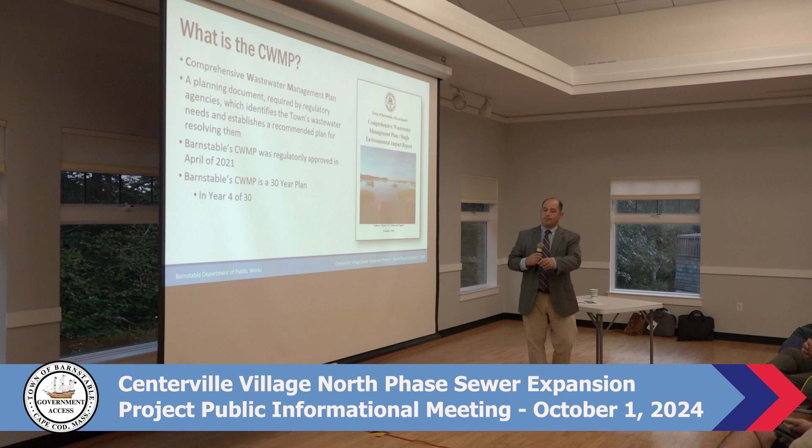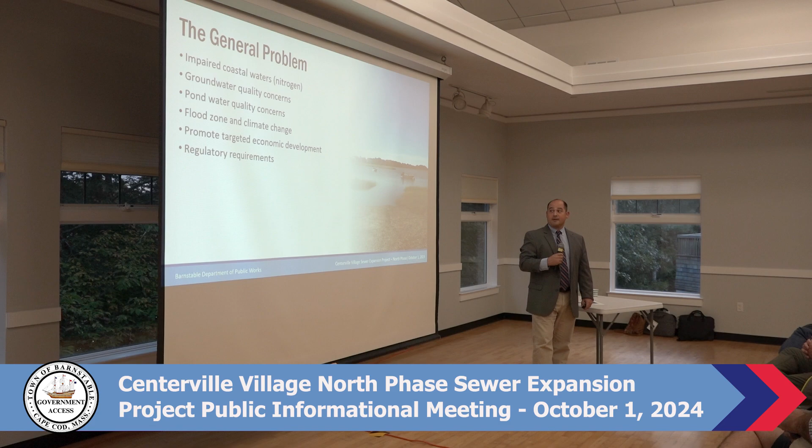Thank you. And the general problems we're looking to address with the plan, the biggest one is nitrogen and impaired coastal waters, but there are others, right? There are groundwater quality concerns, pond water quality concerns, which is one that we're addressing with this project actually. Flood zone and climate change, promoting targeted economic development, as well as achieving regulatory requirements.

That actually worked, Ainsley.

Oh. So just going back through the nitrogen pollution issue in the town of Barnstable, nitrogen pollution has been documented really in all of southeastern Massachusetts as a problem by the Massachusetts Estuary Project. Barnstable's coastal waters are impaired due to nitrogen, particularly the southern facing embayments. The town must meet the total maximum daily loads, which is basically the nitrogen budget of these coastal embayments.

78% of the controllable nitrogen, so the nitrogen that humans can control, comes from septic systems, as you can see in this pie chart here, which comes from the Cape Cod Commission's 208 plan. So Title V systems are not designed to deal with nitrogen, at least not as currently designed.

And currently approved innovative alternative septic systems don't remove enough nitrogen to achieve the total maximum daily loads in Barnstable. Thus, sewers are necessary to achieve the total maximum daily loads, and that is kind of the basis of the town's comprehensive wastewater management plan.

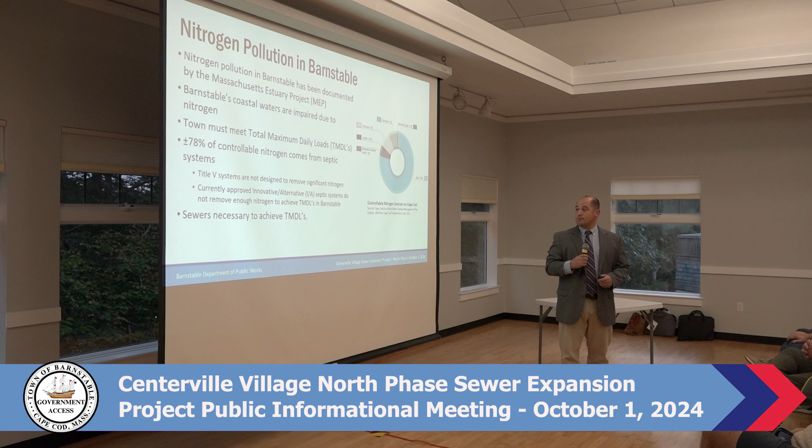What's the cost of inaction? What if we just don't do anything, right? Well, the Federal Clean Water Act compels the community to meet the TMDL. If we do not, there would be further degradation to our water quality, which is obviously bad. Negative impacts to the local economy and property values. The town also risks a court order, lawsuits or other regulatory enforcement, which would put the town in a bad position.

There are newly proposed Title V regulations that also come into play here. The town must implement watershed management plans, which effectively is our CWMP, or the new regulations may actually require every property in town to install a new innovative alternative septic system if we do not complete our plan. So it's another reason why proceeding with our plan as designed makes sense.

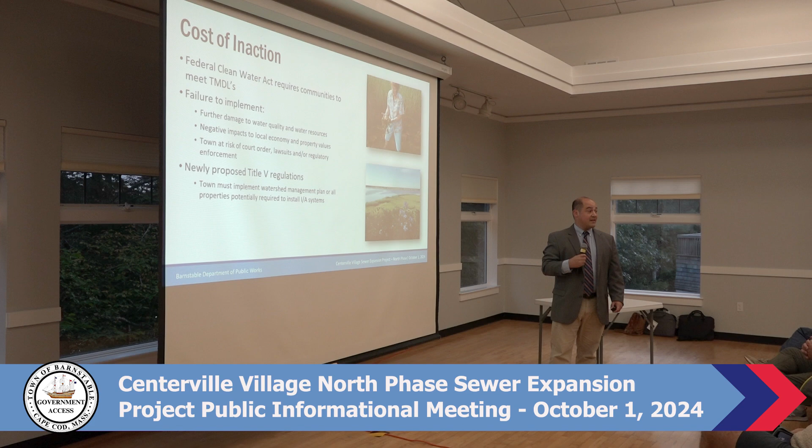So what is Barnstable's plan? It's three 10-year phases of sewer expansion. Again, we're in year 4 of the first phase. It includes about 190 miles of new sewers in the town. Just under 12,000 properties have been identified to be connected to the sewer.

Each phase is not one big project. Each phase will actually have smaller projects within them. The phases are really review periods, effectively to look back and make sure that we're making progress and reviewing if we need to adapt the plan during those intervals.

And this project that we're discussing tonight, the Centerville Village Sewer Expansion Project, particularly the north phase, is the 3rd major sewer expansion project in this program. We have completed 2 major sewer expansion projects to date, one being the Strawberry Hill Road Sewer Expansion Project, and the other being the Route 28 East Sewer Expansion Project.

The plan leverages existing infrastructure to the maximum extent possible. We have the benefit of having a treatment plant. We do need to upgrade the treatment plant, but we have that infrastructure in place as a good solid foundation for the system. We do have existing sewers, mostly focused in Hyannis area, but expanding out now into Centerville, Marston's Mills, Cotuit, etc. And portions of Barnstable Village are also sewered. So we're looking to leverage the existing system to the maximum extent possible.

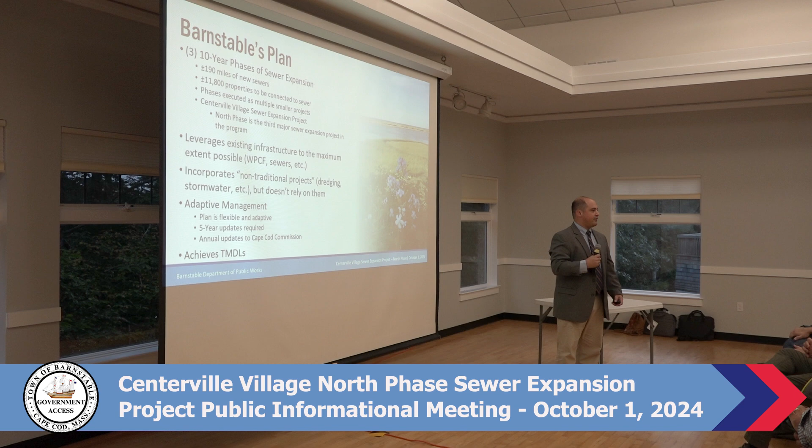And the plan will achieve the total maximum daily loads, which again are the water quality budgets for our embayments, which means we are predicted to achieve healthy environments upon completion of the program.

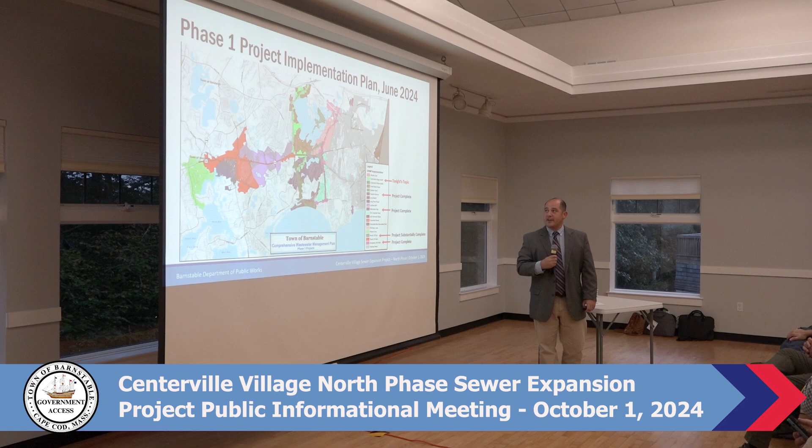And as I alluded to earlier, each phase is broken down into smaller projects. This is what we call our phase 1 implementation map. This shows all the various projects that we will be executing in order to complete phase 1. On the bottom right is kind of a legend which goes over the projects that have been completed or are in process. So in this location here, the pink, that is our Strawberry Hill Road sewer expansion project. That project has been completed.

In green is our Route 28 East sewer expansion project. That project has been completed as well. In this light green is the project that we're talking about this evening, which is the Centerville Village sewer expansion north phase. In the dark green is the southern phase of that project, which is not what we're discussing this evening, as it will be executed at a later date. We'll talk about that in a minute.

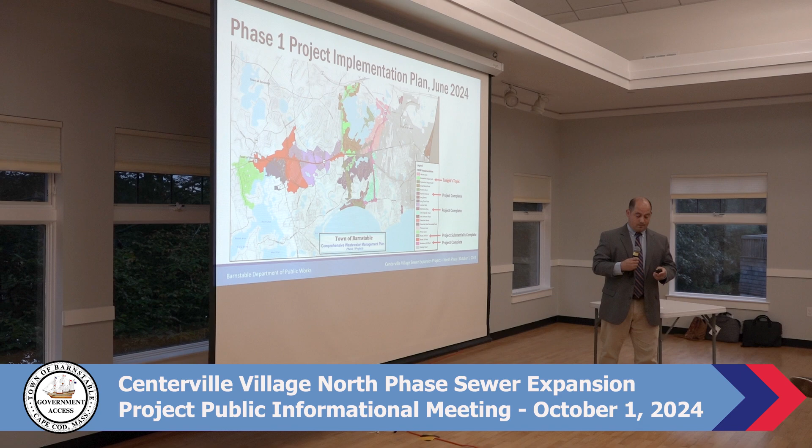So how did the project develop? A little history. So the project ultimately came to be as a reaction to the proposed offshore wind project. So the route initially was identified to sewer the roads that were going to receive duct banks as part of the proposed offshore wind project. It was identified early on that if these projects were to occur, we will need to install the sewers in those roadways,

really to deal with technical issues and construction coordination issues that abound by two large infrastructure projects needing to be constructed in the same corridor, but also to get the benefit out of the paving at the end and not have to rip up a road twice and repave a road twice. So ultimately that's where this project started.

Route 28 from Finney's Lane to Old Stage is in the north phase, and the section of Main Street and Finney's Lane in the Mothers Park area is in the north phase, even though it's south of 28. So the north phase, we're anticipating construction to commence this fall, probably later this fall, but we're in the contracting phase right now. And the south phase is still in development, and we're anticipating construction to commence next fall.

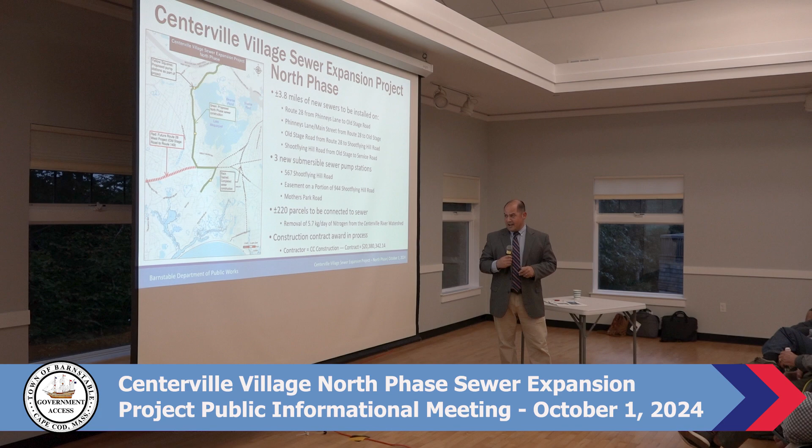There are about 220 parcels that are anticipated to be connected to sewer at the completion of this project, which will remove about 5.7 kilograms per day of nitrogen from the Centerville River watershed. For perspective, that's about 15% of the nitrogen we need to remove from the Centerville River watershed in order to achieve the TMDL.

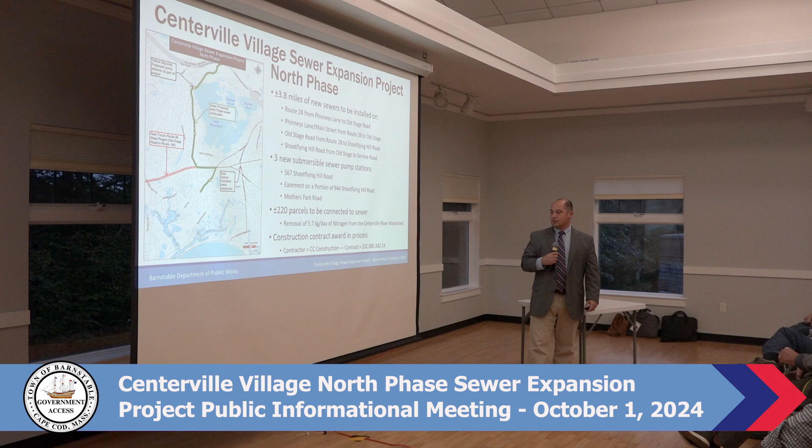And the construction contract award is in process. The contractor has been selected. The low bidder was CC Construction, who actually did the construction of the Strawberry Hill Road sewer expansion project as well. The contract is scheduled to be $20.38 million.

So I wanted to provide some conditions just to kind of let you know what to expect with the work. These are conditions that are in the contract that the contractor will have to comply with. The contractor has 870 days, which is roughly 29 months, to complete the construction. Now that doesn't mean construction will be occurring for 29 months in any particular location, but that's for the whole 3.8 miles of the project.

We anticipate construction starting sometime before the end of the year and completing sometime in the spring of 2027. Our normal working hours will be Monday through Friday from 7 a.m. to 3:30 p.m. All the work on Route 28 will be night work and will occur Monday through Friday from 9 p.m.

...to 5 a.m. Work hours may be modified and extended upon the approval of the DPW director if it's deemed to be necessary. As far as restrictions, we won't be working on town observed holidays, no work from Memorial Day to Labor Day. That said, these restrictions may be modified and waived by the DPW director if it's deemed to be appropriate in order to achieve the goals of the project.

And the contractor's traffic management plans must be reviewed and approved by DPW and emergency services such as police and fire, etc. We also coordinate with school buses. We also coordinate with the postal services just to ensure all these services know where construction is occurring, and we can make arrangements to make sure that these services are still available and that work is being done in a safe manner for everybody.

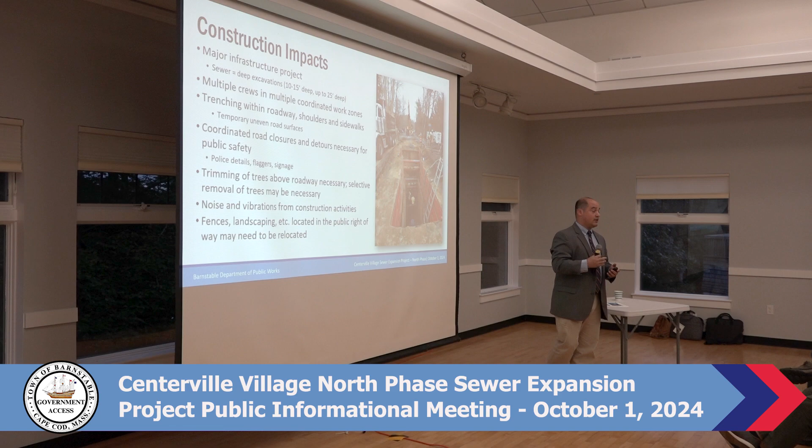There will be noise and vibration from the construction activities, and fences and landscaping and stuff that's located within the public right-of-way may need to be relocated. So what does this look like, right? So there's just some quick pictures. We've all seen this, but we'll come in, we'll do some tree trimming in the areas that we've identified that need to be dealt with.

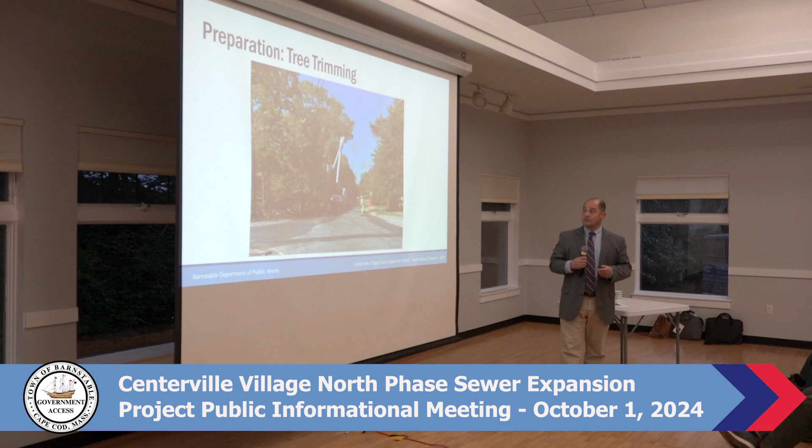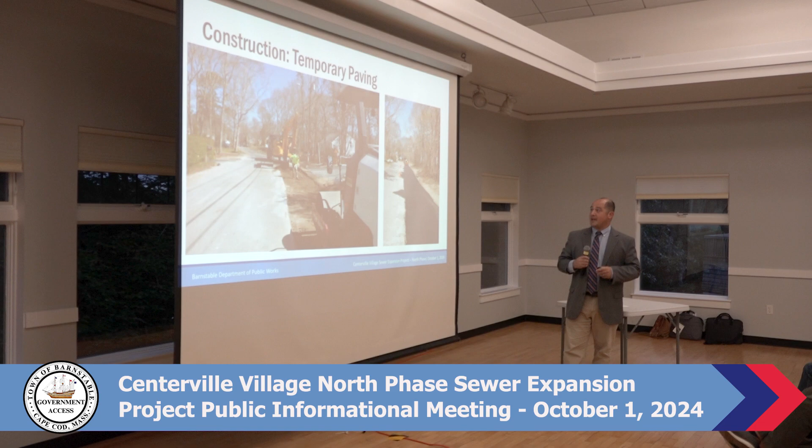There will be excavation within the roadways, right? So just some examples of some of the excavation that occurred on the Strawberry Hill Road project. And then the roads will be temporarily paved. And then upon completion of the project, the roads will be completely paved curb to curb.

So sewer pump stations. I like to have this graphic just to make sure everybody understands why we need to have sewer pump stations. So the way the sewer system works is it's effectively, think of it as your plumbing, right? Except outside, a lot larger, and under a roadway. So we try to install pipes that collect wastewater and direct it by gravity to low points. At a certain point, we can't go any further because we've reached the lowest of low points, right? We can't get all the way to the wastewater treatment plant where it ultimately needs to go.

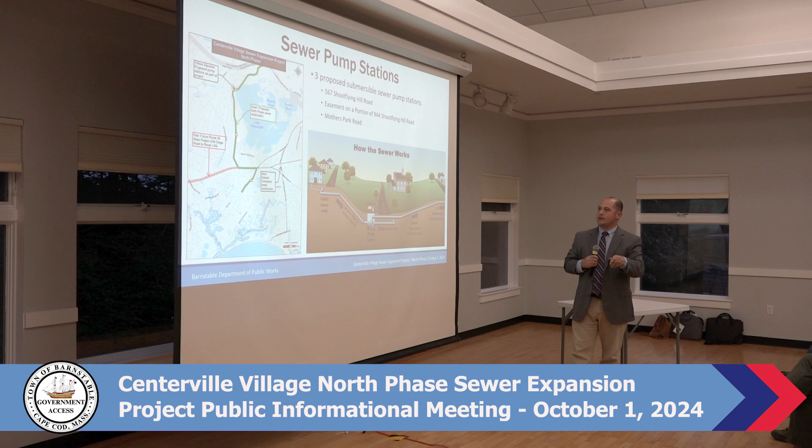On this project, there are 3 proposed that are necessary for this very reason. The first one, again, at 567 Shootflying Hill Road, a town-owned parcel. Another one at 944 Shootflying Hill Road, which is an easement that the town has acquired, and another one within Mothers Park, what is currently Mothers Park Road. And again, I'll have more detail on those in a couple slides.

So what do these pump stations look like? The pump stations we're talking about in this project are not the pump stations you see, for instance, at the intersection of Route 28 and Phinneys Lane. That's not what we're talking about here. That was a major pump station that really will serve the whole CWMP. What we're talking about here is what we call a submersible pump station. So it's a below grade vault where the wastewater comes into, and the pumps are located in there, and that's where all the pumping happens.

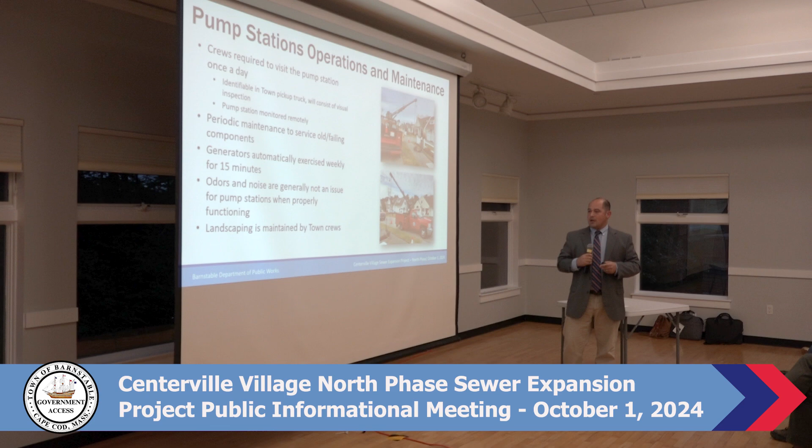Odors and noise, which are usually the biggest question, are generally not an issue for pump stations when they're properly functioning. We don't get a lot of complaints about these. We get a lot of people that are concerned about odors and noise, right? And rightfully so, but that's generally not an issue with this type of infrastructure. And if it is, there's usually something going wrong that we need to correct, and it usually gets corrected very quickly. And landscaping will be maintained by town crews. So I'll quickly just go over the design of each of the 3 pump stations.

Again, at least the first two are very similar to the one that I showed you on Strawberry Hill Road, and then Mothers Park Road has a little bit of a different design to it. So here, this is 567 Shootflying Hill Road. I'll show you a picture of what the site looks like in a moment. But it's a town-owned property, kind of heading up towards Lake Wequaquet. If we're heading north on Shootflying Hill Road, it'll be on the left side.

We have secured a Conservation Commission approval. There is a wetland in the rear of the property that we were within the resource buffer of, so we had to go through the Conservation Commission process. So that has occurred. And we have had some meetings with some of the direct abutters of this project.

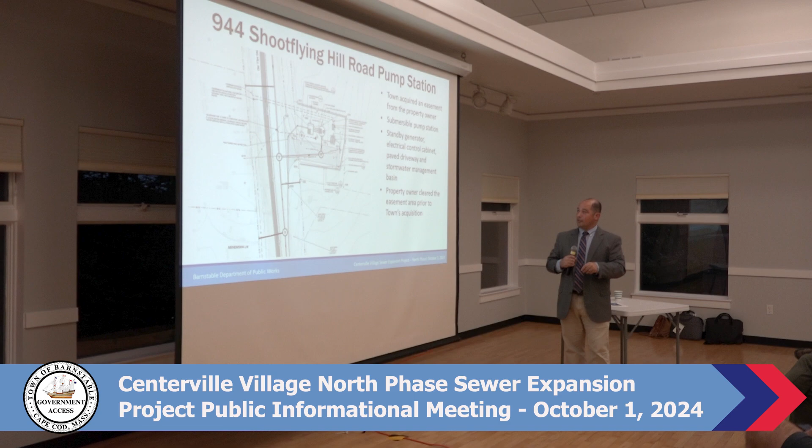There'll be a generator in the rear as well as a control panel. And we'll look to screen the front so that it's kind of screened from the road to the maximum extent possible. One thing I'll note, and you'll see on this sheet, the property owner actually cleared the property before they transferred the easement to us, so we have not started work there, but the property owner was interested in taking the trees down themselves. So you actually can see that the property is somewhat cleared at this moment.

So when you're driving north on Shootflying Hill Road and you're going kind of past the big open space there, you'll see this cleared area on the right. That's the proposed pump station site before you get up to the horse farm, which is actually part of this property.

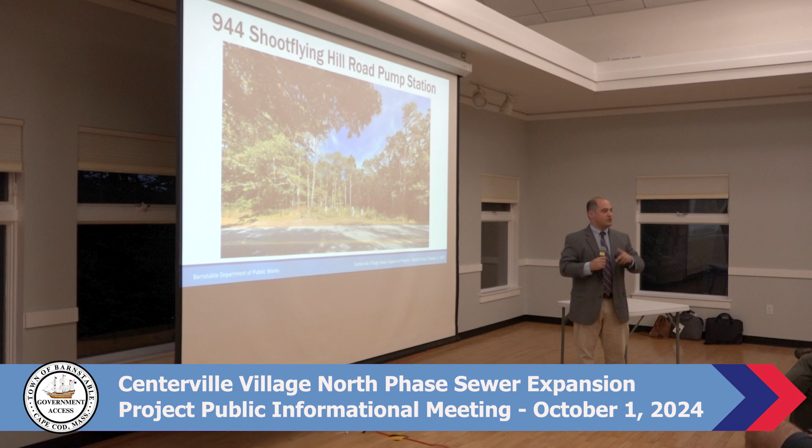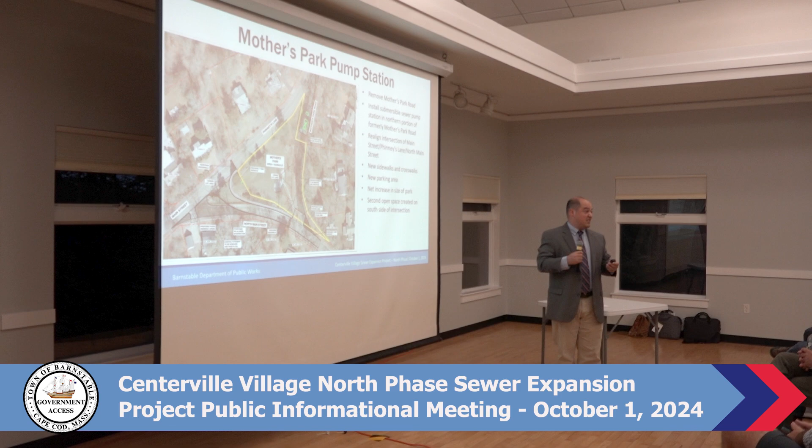Other improvements we're looking to make here, and really were necessary in order to do that, is to realign the intersection of Main Street and North Main Street and Finney's Lane. Due to the acute angle of the current intersection, that's really why this cut-through of Mothers Park existed, so that people looking to go north were able to do so without having to take a right-hand turn at the intersection. So the intersection will be realigned so that it's a properly aligned intersection, and that will be able to accommodate right turns heading north as well as left turns coming from the north and heading to the east.

Additionally, as part of the proposal, we're proposing to install a sidewalk along North Main Street, kind of along the southern end of Mothers Park, a crosswalk on Finney's Lane and a crosswalk on North Main Street, as well as a parking area, so folks can park and enjoy the site.

Yes, sir. Which one of those roads is Finney's Lane? I can't see. Can you point out again? Yeah, Finney's Lane is up here. So this is Finney's Lane, and then when you get right to this intersection here, it transitions to Main Street. Thank you.

So there'll be a new parking area here, which will have an ADA compliant parking space as well, which we're compelled to do when we make these types of improvements, so that everybody will be able to enjoy the park. Ultimately, the park gets larger in size under this proposal, and actually there'll be kind of this second open space area on the south side of the road,

which will be a big green space. We'll figure out down the line what's done with that location, but it'll be some additional open space that will be generated as a result of this proposal. Were you saying that water fountain in the Mother's Park? Yes. Works occasionally? Yes. Yeah.

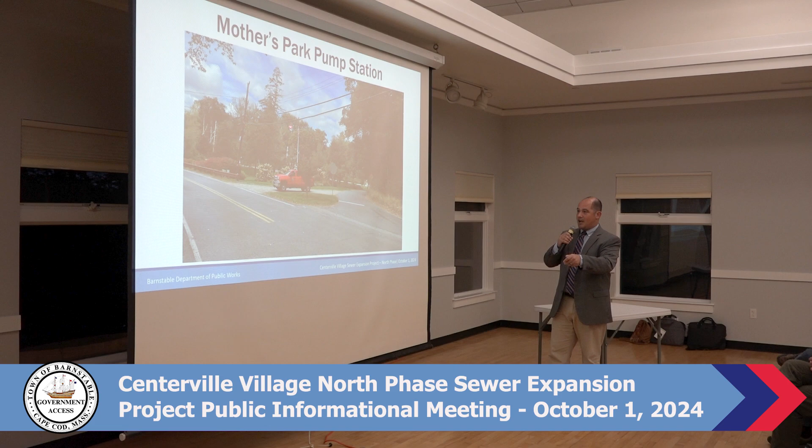This is the current state of the intersection at Main Street and Finney's Lane, which will get realigned. The new intersection will be kind of in this location here in order to make it a more proper intersection that will have better sight lines and be more safe for people to utilize. And then this is the existing parking area, so to speak, which will be enhanced, and a new sidewalk will be installed, kind of where this guardrail is right now, with a crosswalk that crosses the street.

So I wanted to touch briefly on our communication plan so that we can make sure that folks are aware of how we plan to communicate and engage folks with this project. Our one-stop shop for communications relative to everything we're doing water resource-wise in town is barnstablewaterresources.com. The website has been routinely updated and has all the available information you will need to have the latest and greatest information as to what's going on with the project. There are more resources there as well.

You can find our comprehensive wastewater management plan there if you want to read thousands of pages of reports. There's also information on sewer connections and looking forward as to where we're planning to head with projects. There also is information on water quality monitoring. So for instance, our cyanobacteria reporting, there are links on there in order to get to the reporting for that. So we have 3 stages of communication for each project. We have pre-construction communications.

So when we're about to start a construction project, we will mail out sewer connection forms to every resident who's anticipated to receive sewer. Those have been mailed out for this project, and I'm sure a number of you have received them. Actually, by a show of hands, how many people here are here as a result of those mailings? Okay, great. Good, so it was effective. We're happy to see that.

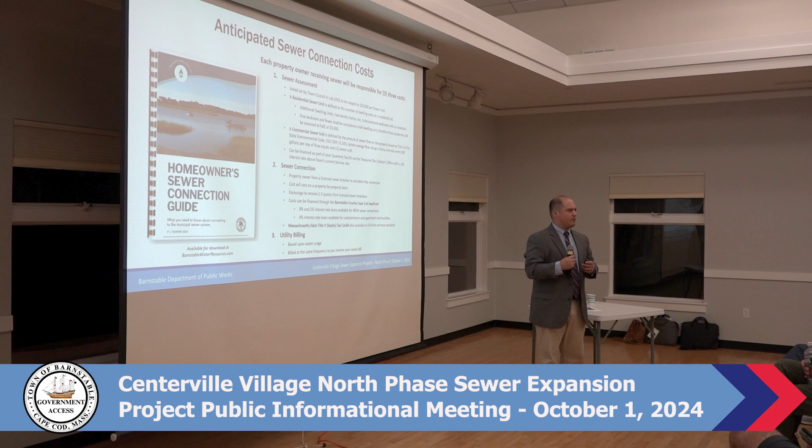And Christopher Gadd is our new communications assistant. He is assisting our communications manager with communicating with the community, this project, and really everything we do at the Department of Public Works. Our communication manager is currently on maternity leave through the end of the year. So Chris will be the point of contact for this project for the foreseeable future.

Any other inquiries and public comments, you can always email the water resources at town.barnstable.ma.us. That comes into, I think, the three of us, as well as the communication staff downtown. So that comes into a lot of people. So if you are going to try to make contact with us and you can't get somebody directly, you can always email that email address, and we would prefer you do so for public comment purposes. And you'll be able to get a response very quickly.

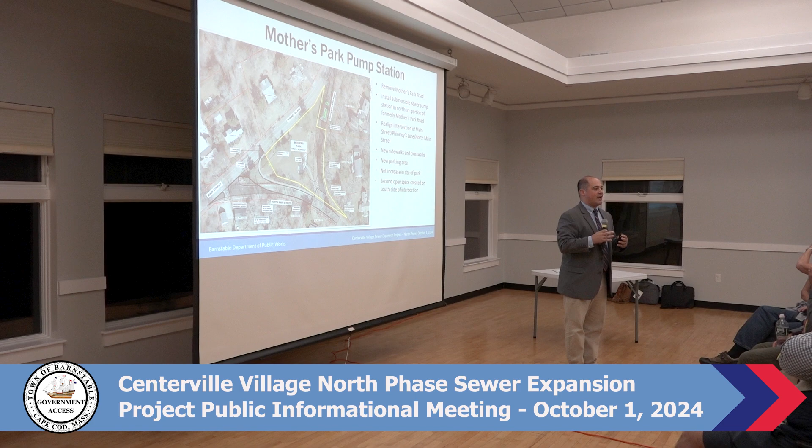A couple other questions. One, when you talked about the Mother's Park area, you're taking away part of the road, and then you're fixing the corner because it's very sharp there, in the proximity to where the pump station's going in. Was there any consideration, when you did the big pump project at the end of Phinney's on Main Street, of fixing that intersection, which is far more dangerous, the sharp left turn onto 28? Certainly on our radar. That's something we would have to do in collaboration with MassDOT, because Route 28 is a state highway. It's so scary. It's absolutely on our radar, and we're advocating for enhancements, but we work with the state on those types of projects.

Okay, and just one quick last question. So our commitment financially is going directly from our property to the street? That's correct. And then you connect from the street to our property? That's correct. So we'll leave what we call a stub, a pipe to your property line, which will be a little bit beyond the street. It'll be to the edge of the public right of way. So you won't have to dig the street up. In fact, we don't want you to do that. It'll be left at the right of way, so you'll make a connection somewhere in your front yard. Okay. Thank you.

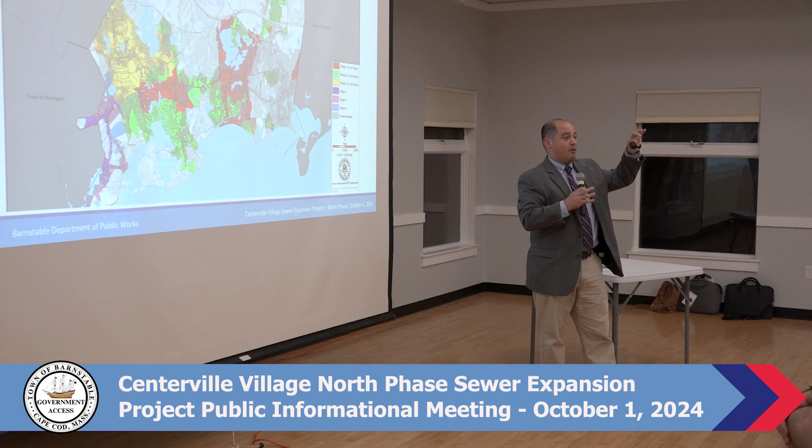Yes, ma'am. Going back to the map showing the lake, what about sewering on the east side, Lakeview Drive, and the white part up there? I'll go back one more slide. That area is within this plan. It's in phase 2 of the plan, and that really was just because of our projected timeline to build the infrastructure up to there. All the timelines are reevaluated constantly and will be as part of the adaptive management plan, so that could potentially change, but there are limitations to how quickly we can get there.

Just a couple of other questions. Is there reason to hope that with the sewer going in, the cyanobacteria will be less of a problem? We would assume so, but we don't know. However, we have a study underway that is going to identify the nutrient inputs into the pond.

So last year, the town council funded a management plan development for Lake Wequaquet. It's in development right now. The School for Marine Science and Technology at UMass Dartmouth is undertaking that study, which includes rigorous sampling of the pond and understanding all the nutrient inputs into the pond. And they're gonna tell us, well, the problem is X. And we anticipate it'll probably be sewer, but we don't know that definitively yet. However, we proactively planned to address it that way.

Are they the ones just recently off the town beach diving and taking samples? I don't know for sure, but I would assume so, because they do take core samples as part of the project.

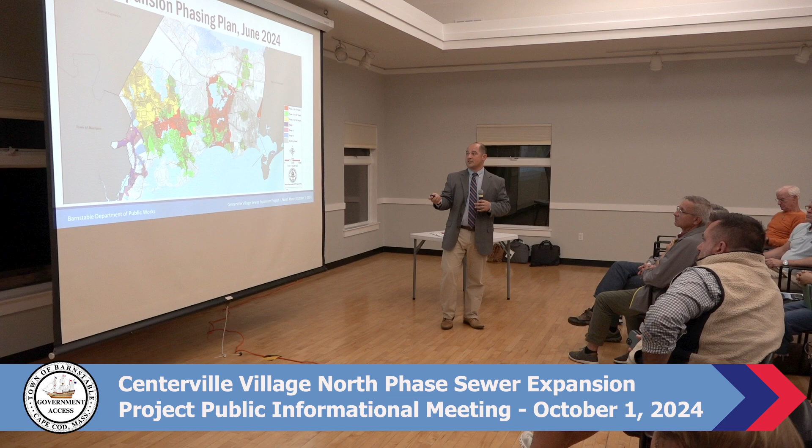Where do you need to remove and how much do you need to remove in order to have a healthy environment? When we got to the end of the design and planning of the program, we didn't need to do this area in order to meet the TMDLs. So this was the area that was really left out for that purpose. These were the areas we needed to focus on in order to achieve the total maximum daily loads. Interesting.

Any additional questions? Councilor? I just want to say the north side has a 9.5-foot tide, so Barnstable Harbor flushes into Cape Cod Bay much more easily than Prince Cove North Bay. So geographically it's got an advantage that way. But you also can't see, but the whole courthouse area is already sewered.

That's right. Actually, it's a little hard to see here, but this area in gray, which you probably can't see in the back, represents existing sewer systems. So kind of the downtown Barnstable Village area near the courthouse, up near Millway, is already sewered.

Any more questions? Yes. The houses that are actually lower than the sewer that would require a grinder, would they also require a generator in case their power went out? So current policy, they will not require one. Okay. They may choose to install one. It's beneficial? You know, there is storage within the grinder pump station, a very minimal amount.

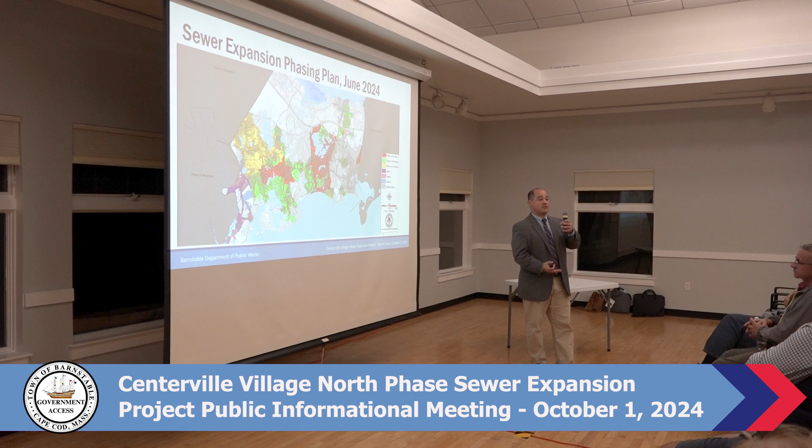So you can still flush your toilets and stuff during power outages, and you won't have a backup, but you probably don't want to run your laundry, and frankly you can't because the power's out anyway, and you probably don't want to take a bath, right? You'll just have to mitigate your water usage, but you may want to install a generator in order to have that luxury.

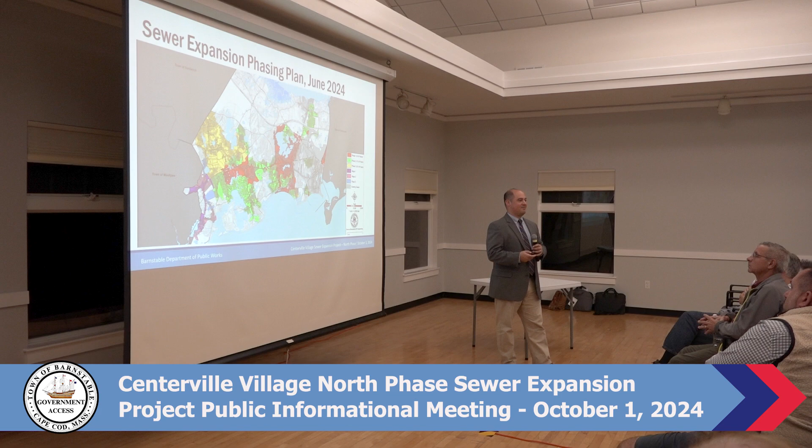Yes? Is there some sort of a rule of thumb for how often you need to have a grinder pump, how many feet? Is one typically sufficient, or how do you calculate that? And if someone has to have two, does the town pay for the second one or the homeowner? I wouldn't anticipate anybody will need a second. It would have to be a very, very long run, and I don't think we have any property in town where that will be the case. I'll probably eat those words at some point, but certainly not along this route.

If you do have to have a grinder pump, are there additional electrical costs the homeowner would be obligated to pay to hook it up? Yeah. You would have to connect the grinder pump to your panel and your electrical system, so there will be electrical costs associated with that. Some people may need a new sub panel. It really depends upon your situation, but there will be a cost associated with electrical connections.

And are those pumps above grade or below grade? They're in the ground. They have different types. The ones that we spec would be in the ground with kind of a cover at grade that you can hide if you'd like to. They do have ones that can go in people's basements, actually. Those aren't the ones we're specifying, but we could opt to go that way at a later date.

Yes, Councilor. Just to clarify the betterment fee, the $10,000, that's a maximum. Correct. I think along Phinney's Lane, people are getting those now for $6,300. It's less than 10,000 along Phinney's Lane. It depends upon the total capital cost and the amount of people that will ultimately utilize the infrastructure.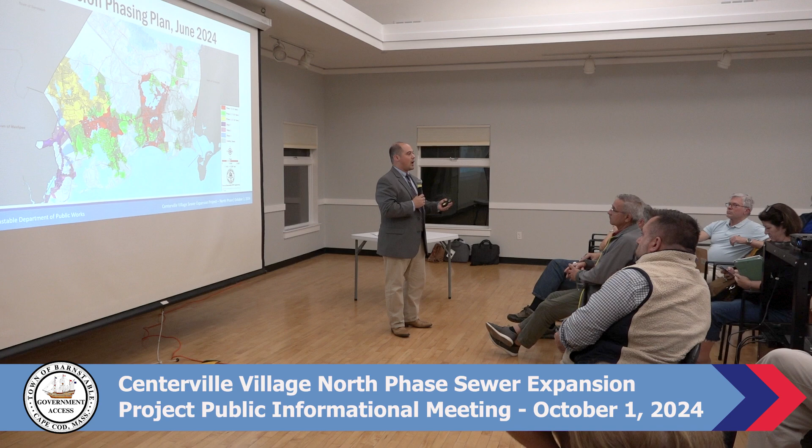So the town is already using other financial ways to subsidize the cost. Some communities do it as a 50-50 betterment, some do it as 100%, all recovered by the property owner, and it could be a $50,000, $60,000, $70,000 betterment, and the community chose not to do that.

Any other questions? Yes, sir. Why are excavations so deep? The question was why the excavation is so deep. Ultimately, we have to make sure the pipes are able to flow by gravity, and they need to have a certain slope. And we try to minimize the amount of pump stations, so in order to do that, we end up being deep to go against hills at a certain point. It just comes down to the design of the system.